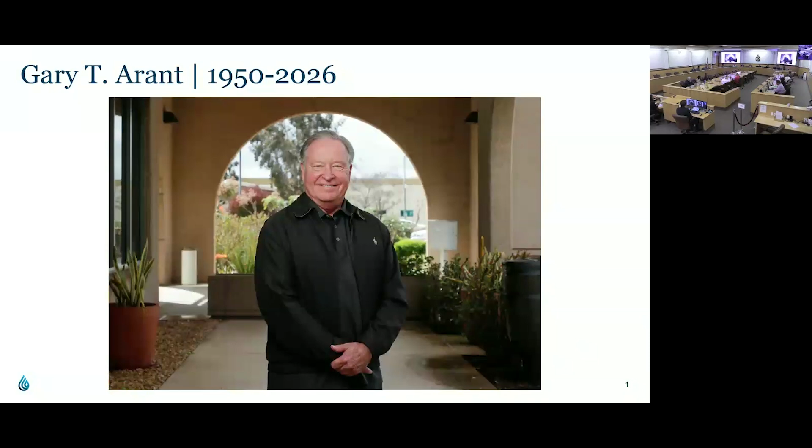Gary passed away on July 16th. He was a sitting member of this board representing the Valley Center Municipal Water District. His departure is truly not just about this agency and what it means to us here, but so much to the broader water community and to so many of us who had the privilege of serving with him. Gary was, in every sense, a pillar of this institution. He was a presence, a source of wisdom, and someone whose influence reached far beyond this boardroom and far beyond this agency. As our general manager said in his statement, he was an icon in the water world.

And how privileged are so many of us to have known him. I will confess, I didn't have the blessing of knowing Gary for as long or perhaps as personally as many did in this room. But what I will always remember and always be grateful for is how accepting he was of my service here, not only because of who I represent on this body, but for who I am as a person.

That meant a great deal to me personally, and I believe so many of us had that same experience with him. Like many, Gary was someone I looked to—someone I looked to when I wanted to make sure I was on the right track, someone I looked to when I wanted to know whether what I was thinking or the vision I had was crazy or actually made sense, someone I looked to simply to better understand.

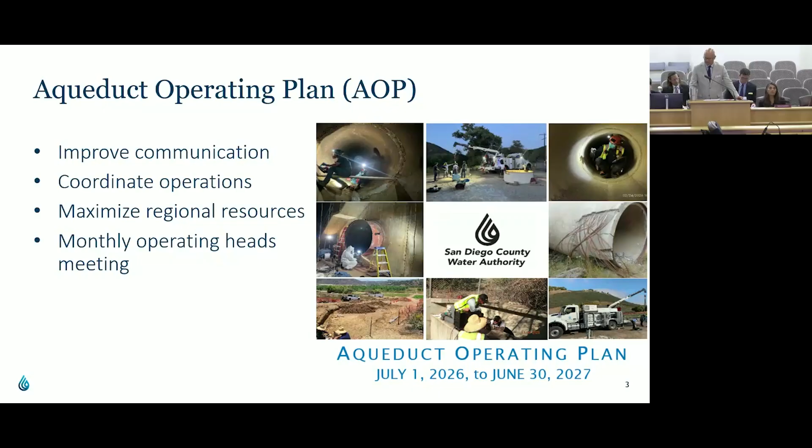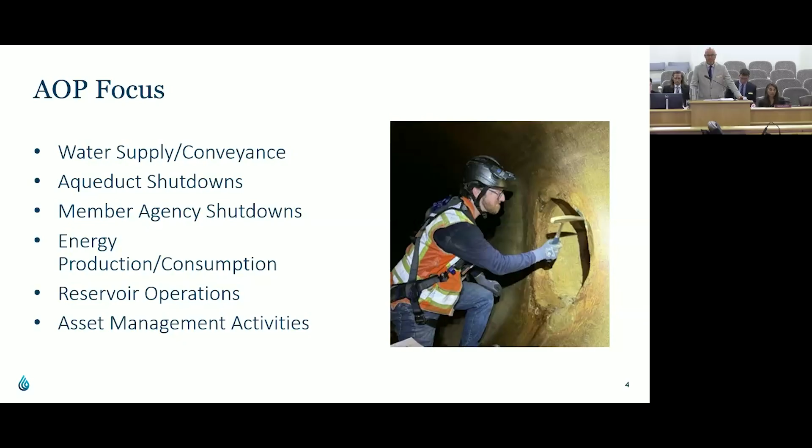The AOP is organized around 6 key focus items that collectively support reliable water service throughout the region. These include water supply and conveyance, aqueduct shutdowns, member agency shutdowns, energy production and consumption, reservoir operations and storage management, as well as asset management and major maintenance activities. Together, these areas provide a comprehensive view of how we operate, maintain, and improve the aqueduct system.

Water supply and conveyance planning is one of the most important components of the AOP. We use member agency demand projections along with forecasting tools and operational modeling to estimate future demands and evaluate system performance. This allows us to assess available water sources, contractual obligations, treatment and conveyance capacity, operational constraints, and water quality considerations. Our goal is to ensure that we can reliably meet regional demands while maintaining flexibility and operational resiliency.

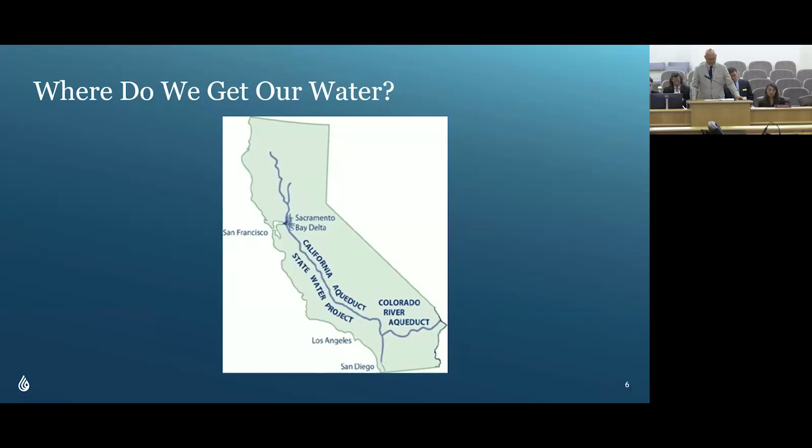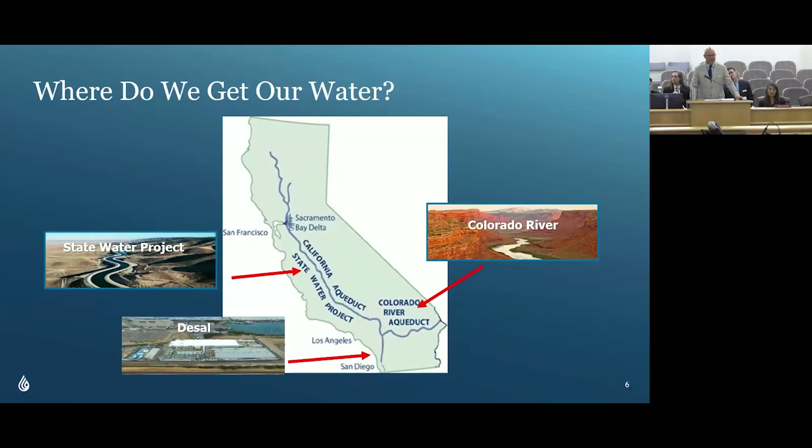So where do we get our water? I think this is an important section. The next section of slides provides a little background history on the operations of the system. We're all familiar with the Colorado River water that comes into the region. We're also supplied with the State Water Project, and back in the mid-2010 to 2015 area, we introduced desal into that mix. So we have a very broad supply of source water coming into the region.

How do we do it? There's roughly about 300-plus miles of pipeline ranging in size from 30-inch to 108-inch in diameter. Within that infrastructure, there's roughly 1,600 structures that allow those pipelines to operate properly, including blow-offs, pump wells, and air valves. Just about 100 flow control facilities—majority of them are in service, some are out of service—but that allows us to pull off of the aqueduct system to maintain water deliveries to our member agencies.

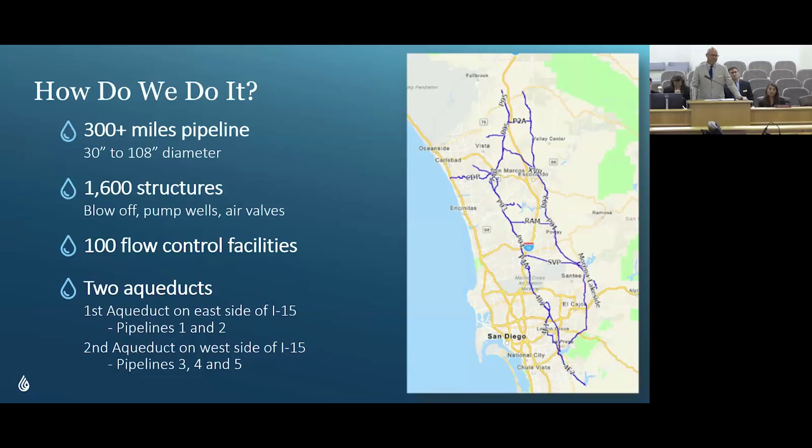Those control facilities and all those structures are contained within the 2 aqueducts. The first aqueduct is on the east side of the 15 freeway, which consists of pipelines 1 and 2. The second aqueduct is on the west side of the 15 freeway for the most part, which consists of pipelines 3, 4, and 5.

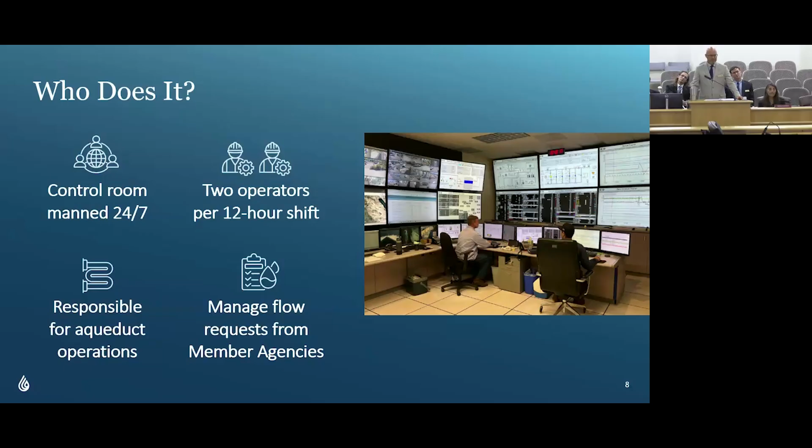So who does it? Well, the control room is manned 24/7. There are 2 operators in that control room to ensure they are monitoring everything taking place. Those operators work 12-hour shifts, 2 during the day, 2 during the night. They are part of a 16-man crew responsible for flow of water as well as water quality. They are the ones who, when member agencies call for water requests—whether more or less water—make those changes and ensure the system is maintained in a balanced state.

Our system is very unique in the sense that it's not a typical distribution system where it's a grid or a Christmas tree. It's basically north to south. So when water is ordered, back in the good old days when it was very simple, water came from the north from Skinner.

Basically you just had to make sure you ordered enough water to make it all the way to the bottom, so you didn't dry up the lower siphons or overflow through the vents into reservoirs. Things changed back in the 2015 timeframe when desal was introduced, and we were able to move water from the coast up into our highest point of the system, basically in the Twin Oaks area at the diversion, to where that water is blended at the Twin Oaks treatment plant, and we're able to feed water even north across over to the first aqueduct.

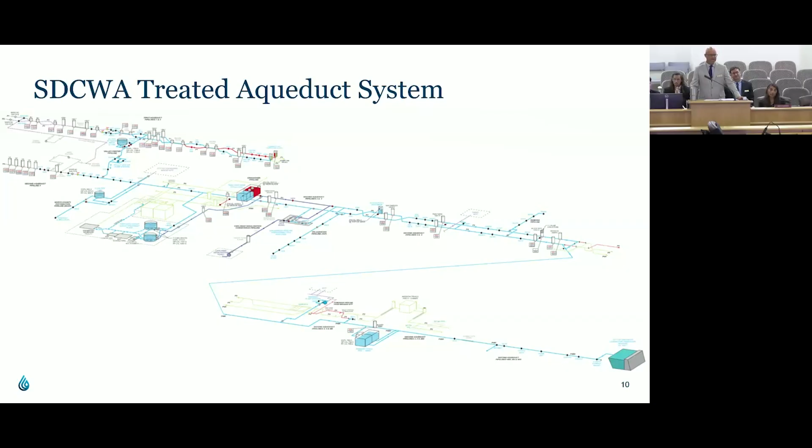This is our untreated system, basically the same thing, a little bit more complex because we actually do have some interconnections with the reservoirs, but ultimately the same concept, a north to south operation.

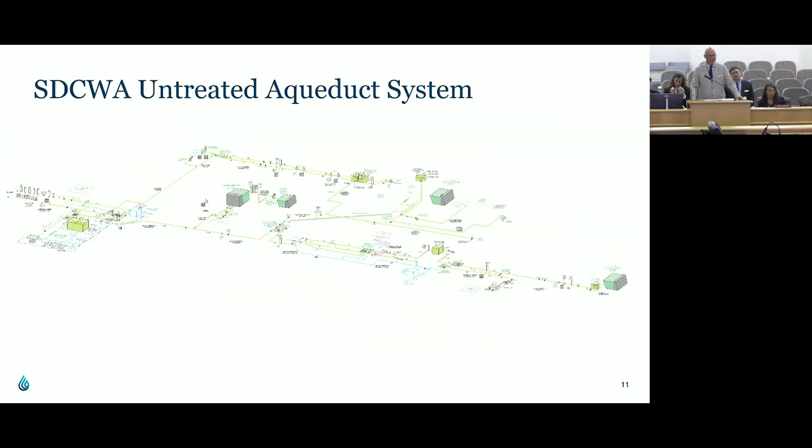So the sources of water that come into our system on the treated side consist of the Skinner treatment plant, which feeds into both the first aqueduct as well as the second aqueduct. Pipelines 1 and 2 have a capacity of 180 CFS, roughly 90 CFS per pipeline.

We are able to take those pipelines down to roughly 13 CFS. The reason why it's 13 CFS is the meter is actually set up for 130 CFS, so it's 10% of the meter minimum. The unique thing about the first aqueduct is we actually can take either one of those pipelines or both to zero if there is no demand on the first aqueduct.

On the second aqueduct, a little bit different story. There is a capacity of roughly 450 CFS. You'll notice I made the comment about 10% of meter capacity, so you would think that minimum would be 45. A number of years back, because of the change in regional demand and operations of the system, we collaborated with Metropolitan to install a bypass around the main system to where we were able to operate down to a lower volume to maximize the region's water sources.

The challenge is, why there's 2 asterisks on there, is we cannot operate pipeline 4 to 0. We always have to maintain water deliveries on pipeline 4, which makes it very challenging. Good and bad, but because of how the system was operated or designed, it cannot withstand that gradient. There's no way to just stop the flow. So that's why there's the 2 asterisks, just to reiterate that.

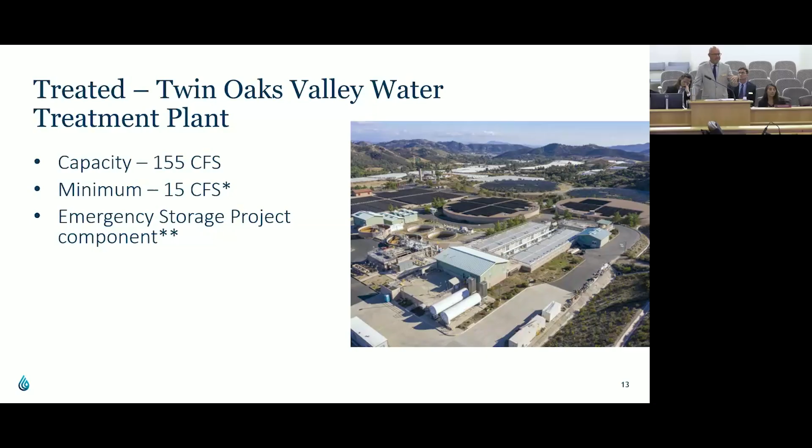Over the course of its operation, we have worked with their team to allow them to make changes within the system to where we can actually turn them all the way down to 10%, roughly 15 CFS. It's a bit of a roller coaster ride, to be honest, operationally, but it can operate all the way down to that level. And because of its unique location and all of the supplies in the region, we are able to consider this a major part of the emergency storage project.

We also have the Carlsbad desal plant, which came into play back in the 2015 timeframe. 83 CFS capacity, roughly - if you want to get technical, it's 83.55, but we'll stick with 83. We can operate it as low as 26 CFS, and it is a critical component as well as the emergency storage project.

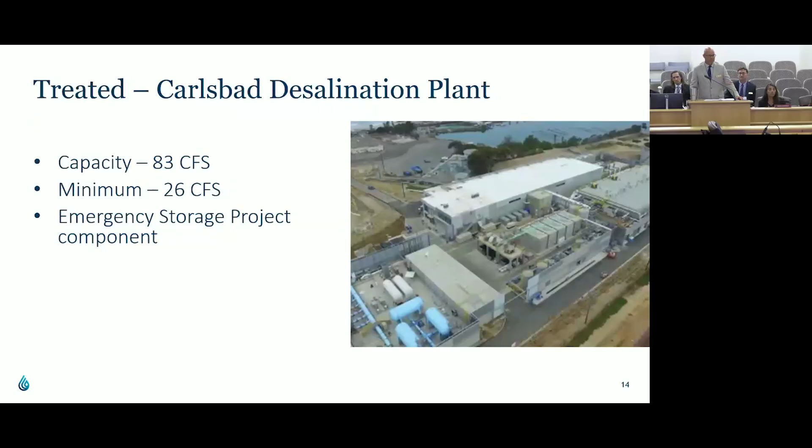On the untreated side, we have 2 aqueducts or 2 pipelines within the second aqueduct that allow us to convey untreated water into the system. Total capacity, roughly 780 CFS. We can take those down to the minimum. We can also take them down to 0 if we need to.

We also have Olivenhain Reservoir, which provides us a body to store water for emergency purposes as well as operational needs, with capacity just under 25,000 acre feet. Depending on hydraulic conditions on the system, we're able to gravity into the reservoir up to 75 CFS if we can configure it appropriately.

We can withdraw water up to about 84 CFS as well. In the event we have to pump, because of system hydraulics, we have to overcome the downstream head conditions, so we utilize the pumps at that station. They're each 2,500 horsepower, so they're not little Home Depot pumps. Roughly up to 120 CFS on the inflow and up to 340 CFS coming out.

There's a little bullet at the bottom of this slide about limitations. These are because of the water quality within that reservoir — the downstream users worked together as a technical advisory group to come up with certain parameters that the water coming out had to meet. So it's not a direct 'we want to take 50 CFS out.' We have to consider the actual source water in the reservoir or aqueduct and make sure it's within a certain percentage of the constituents before we can allow that water out, which is challenging, but it is a limitation.

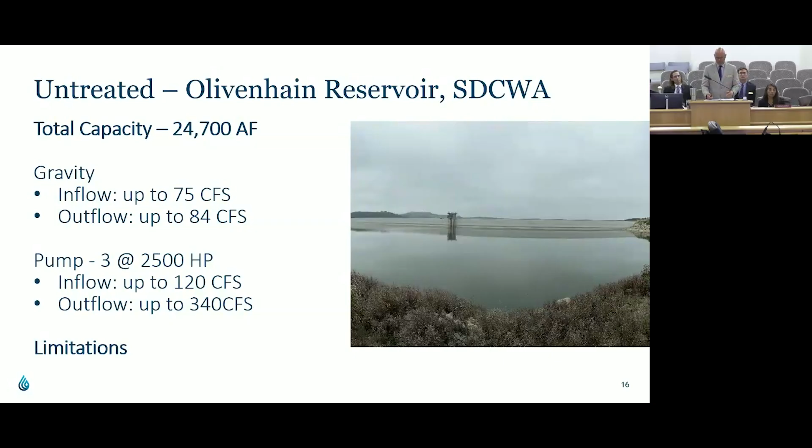San Vicente Reservoir is the other reservoir in our region where we have storage rights, up to almost 160,000 acre feet. Inflow by gravity off the first aqueduct, up to 150 CFS we can put in. On the second aqueduct, with the San Vicente Tunnel and the fill chute, we can put up to 350 CFS in. I have yet to see the 350 mark honestly, but when we had those torrential rains a few years back, we were pushing almost 300 CFS into that reservoir because there was no demand elsewhere.

On the outflow side, we have a pump station at the base. We're able to use 1 or 2, not 3 pumps at a time — they're 7,500 horsepower, so these are even bigger. There's an asterisk by that line because 2 of the pumps share the same variable frequency drive, the VFD, so you can't run them simultaneously. At most, we can run 2 pumps at the same time, pushing up to 320 CFS out of that reservoir.

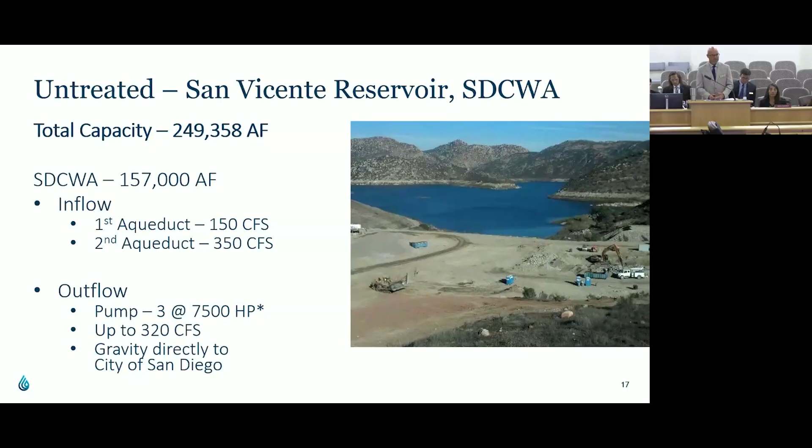We also, with the interconnections, have the ability to gravity into the city's El Monte Pipeline, which allows water to be fed to the Miramar Treatment Plant, providing some operational flexibility.

All of these things play into this slide. A number of years back, the board in the region decided to invest in emergency storage for regional resiliency, which includes those 2 reservoirs, as well as the Twin Oaks plant and the desal plant. This system of reservoirs and interconnected pipelines allows us to maintain 75% reliability and delivery of water during an event of full separation of water from up north, in a 2-month or 6-month exercise. So our region is set up extremely well if and when, knock on wood, something were to happen.

So how does that work? Well, San Vicente Reservoir has the ability to pump that water out, and we can basically feed the lower section of our system to all the member agency treatment plants. You'll notice the arrow on the upper part of that screen does not go all the way up — the water in San Vicente Reservoir hydraulically cannot move any further than basically the Del Dios Highway area. That's a good landmark, but it keeps all the treatment plants south of that in water in the event of an emergency.

One unique thing to note while we have this slide up: the San Vicente Pump Station was put in place primarily for emergency storage operations. We've changed our mode of operations from day-to-day to where this is now part of our tool chest. We're actually pulling operational storage out of the reservoir as we speak, about 100 to 150 CFS from previously stored water. So we're getting operational use, which is a huge value to keep — pumps don't like to just sit, so it's a huge benefit to have that in our toolbox.

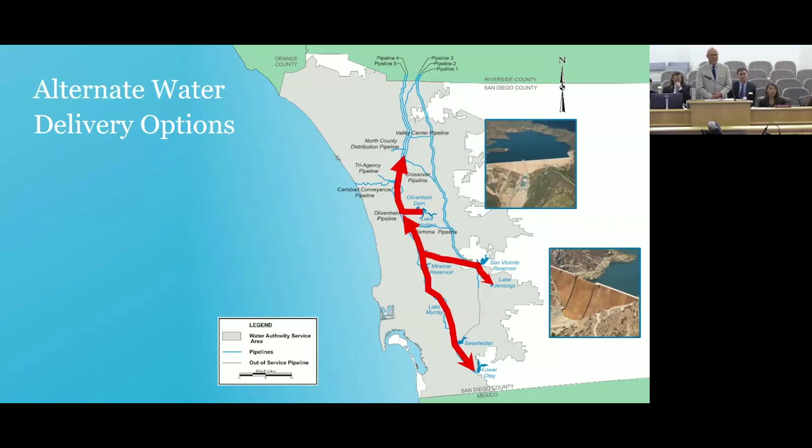In addition, we have Olivenhain Reservoir, which basically feeds the upper portion of the system, keeping all the northern treatment plants in water when an event takes place. We also have the Carlsbad Desal plant, which puts treated water into the system up to Twin Oaks and allows us to maintain water deliveries to all of our flow control facilities. Great operations and investment — an awesome strategy so that in the event something were to happen, we are covered.

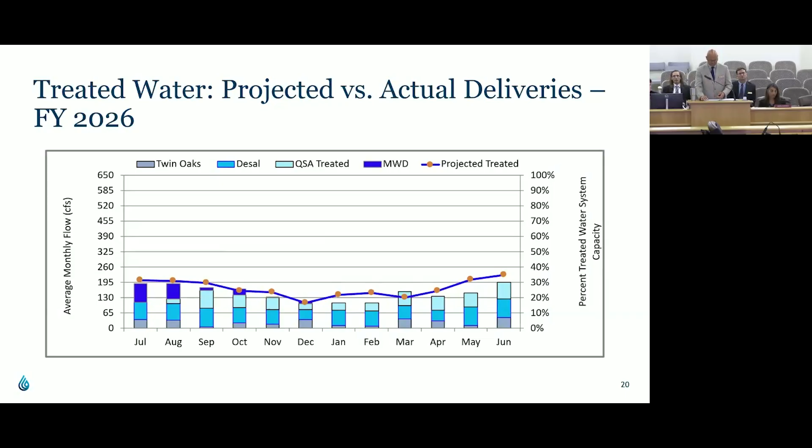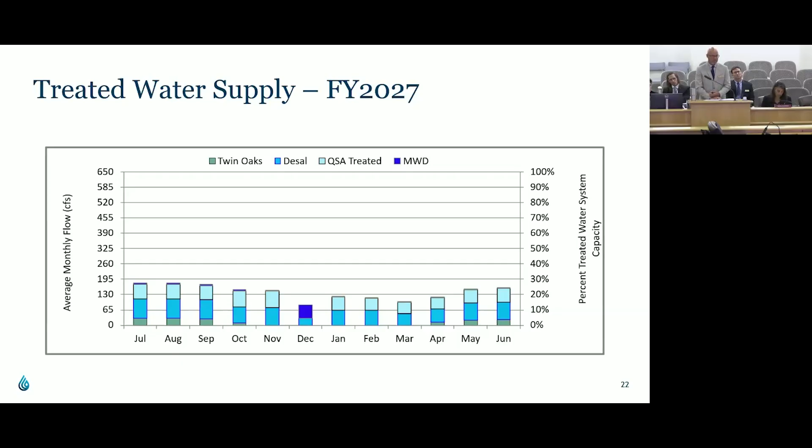Looking ahead in fiscal year 2027, treated water deliveries are projected to peak at approximately just under 30% of treated aqueduct capacity. We will use all of the sources of water. You'll notice there's a little bit less shown on Twin Oaks for the year, because Twin Oaks production is lower due to the Pipeline 5 Reline project, which starts in early November and takes the plant offline while that's taking place.

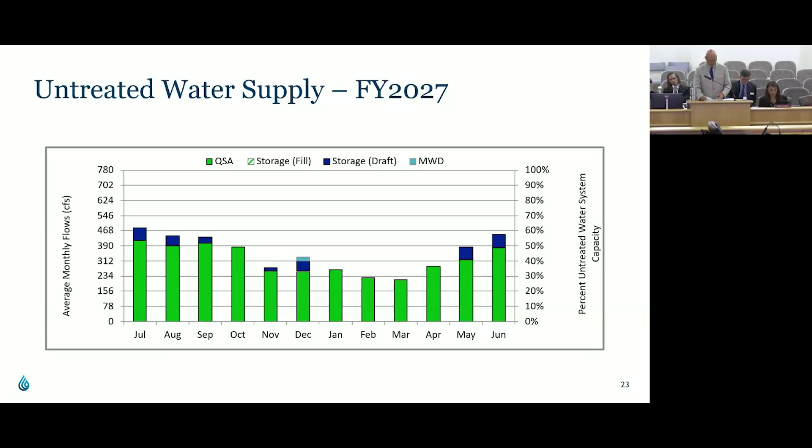On the untreated side, we are projecting roughly just a little over 60% pipeline capacity based on projected demands. Good supply mix: over 90% is going to be supplied by QSA, roughly just under 10% is operational storage pulled from our reservoirs, and the balance, seen around December, is a slight sliver for MWD deliveries. That'll help balance the QSA because demands are never perfectly projected or actually taken, giving us some flexibility at the end of the year. These projections demonstrate the continued importance of QSA supplies in the region's overall water portfolio, and we do not anticipate any conveyance constraints or limitations this year.

Aqueduct shutdowns and outages: shutdown planning is a year-round effort that relies on extensive coordination with both internal departments and external stakeholders. We maintain a rolling 3-year outlook to identify upcoming operational needs and maintenance requirements. Each year, a draft shutdown schedule is developed by January 31st, giving member agencies and operational staff sufficient time to coordinate activities and prepare contingency plans for planned outages and shutdowns. The objective is to safely complete the necessary work while minimizing impacts on water deliveries and maintaining high levels of customer service.

Each shutdown or outage undergoes a detailed evaluation process strictly by itself. For every event, we review who is affected, what work will be performed, when the work can be completed most effectively, and where the impacts will occur. We also evaluate potential impacts to member agencies and opportunities to combine multiple projects into a single shutdown window. In general, shutdowns affect a larger portion of our system, whereas outages are more localized with very minimal operational impact or footprint.

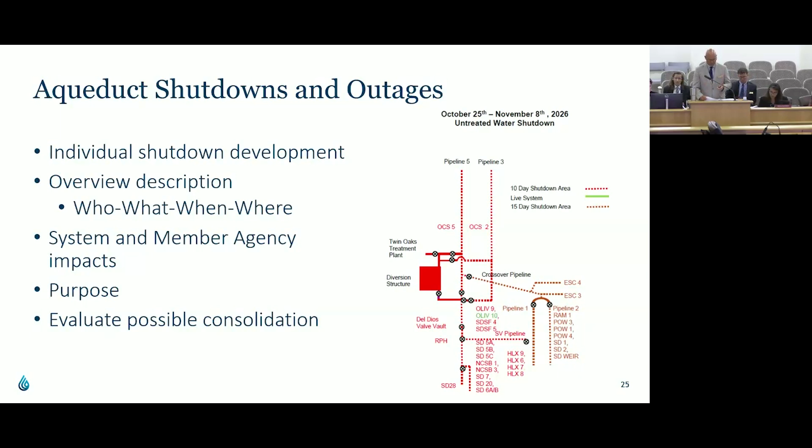Here's our shutdown schedule. There's not too many on there, but if you look in those bubbles there's a lot of work activities taking place. We currently have 3 planned treated water shutdowns shown by the 3 blue boxes, and 2 treated water outages on the bottom in orange, which are our pre-scheduled desalination plant shutdowns. We also have 2 untreated water shutdowns scheduled. These activities support inspections, maintenance, facility improvements, and other work necessary to maintain system reliability.

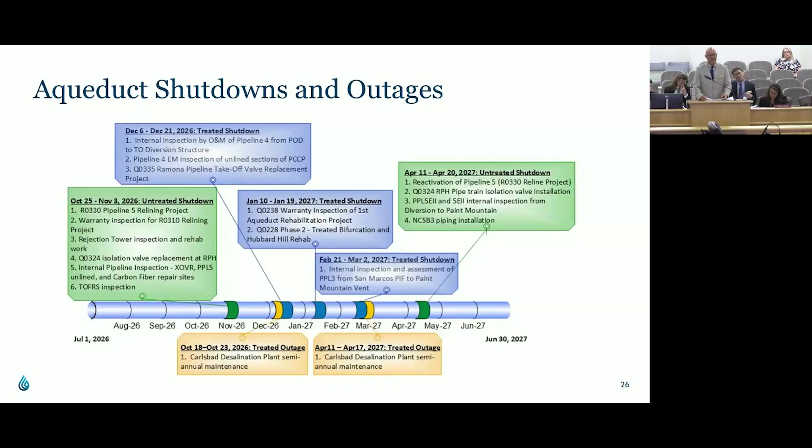Careful coordination helps ensure that impacts to member agencies remain manageable and predictable. It's not just about our shutdowns, though—it's also about the member agency shutdowns. In addition to our own, we coordinate closely with member agencies and their operations staff to be aware of their planned activities so that hopefully there's no overlap causing issues. This collaboration allows us to understand regional impacts, identify potential conflicts, and find opportunities for coordination, resulting in more efficient maintenance scheduling and improved reliability throughout the region.

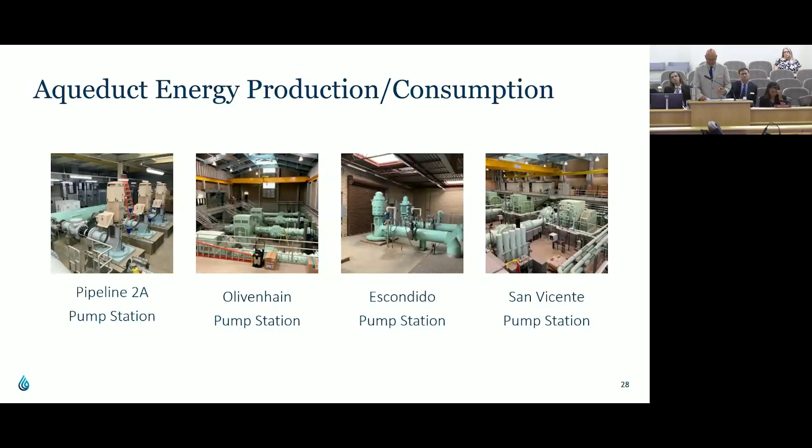Energy management continues to be a significant operational focus. This slide highlights several major facilities that are our high energy users. Obviously the pump stations, at 7,500 horsepower and 2,500 horsepower, consume a lot of energy. We're always monitoring energy use at these facilities to identify efficiencies, manage costs, and support operational efficiencies.

We also have additional high-use facilities, the Miramar Pump Station and Twin Oaks Valley Water Treatment Plant. We also have our solar systems installed at the Escondido and Kearny Mesa headquarters, as well as the Twin Oaks Flow Regulatory Structure.

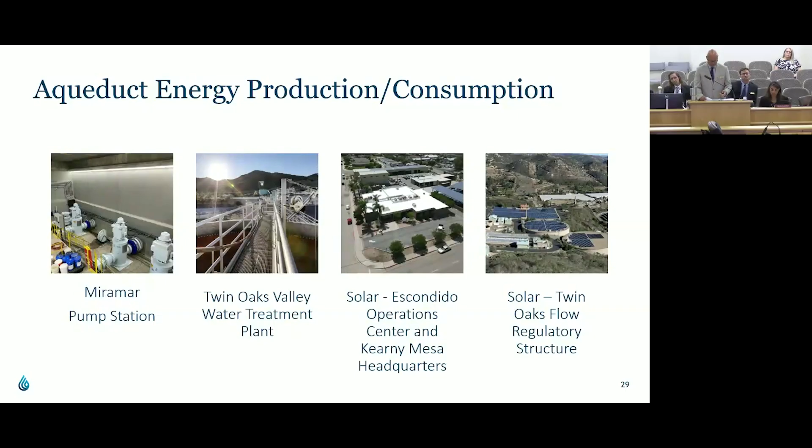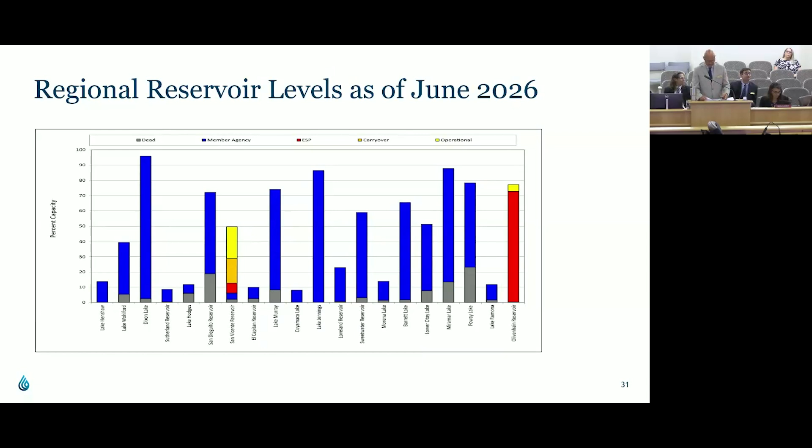There we go. All right, so almost on the home stretch.

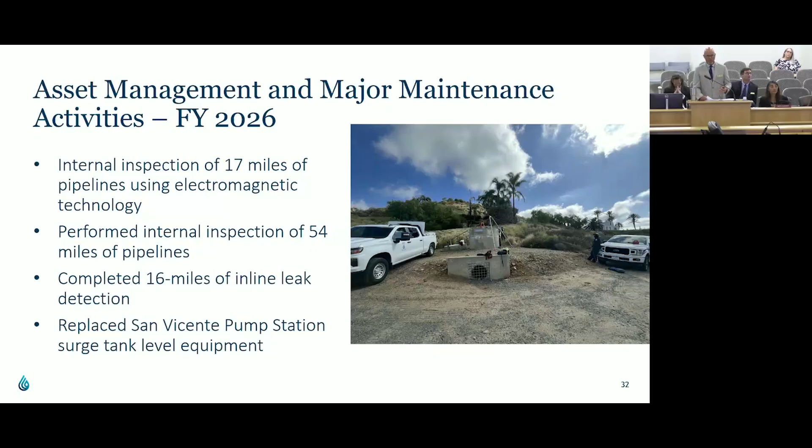Our asset management and major maintenance activities accomplished this past year. This just highlights a few of the activities. A lot of internal inspections on the pipelines, taking advantage of those shutdowns, getting in there and using the best technology available to ensure we're getting the most data we can to make informed decisions on our path forward as far as maintenance.

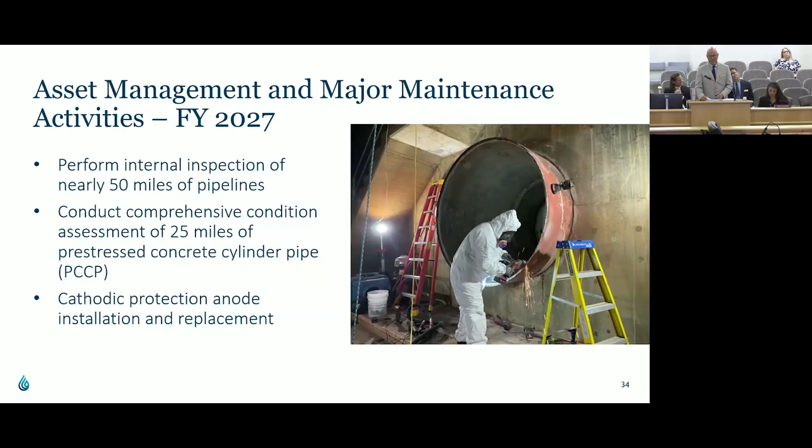Moving into 27, again a lot of pipeline inspections. 50 miles of pipeline is currently on the books for internal inspection, with a more in-depth assessment of 25 miles of our PCCP pipe, the pre-stressed concrete. Continuing with the cathodic protection as well, which is a huge item that seems to never go away.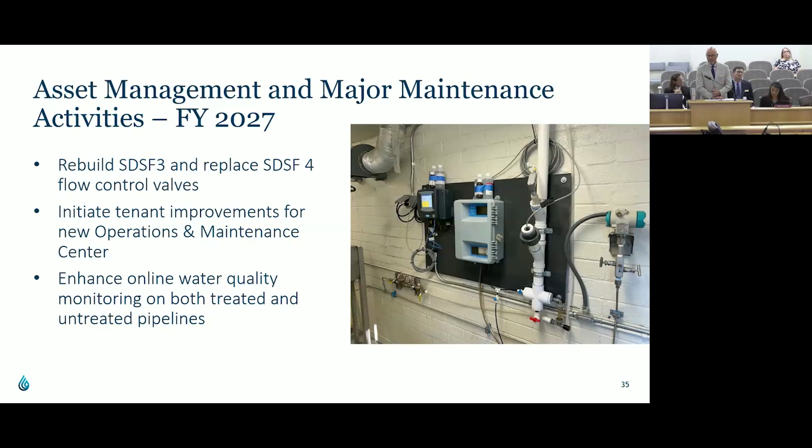Again, the buildings and our infrastructure are getting older. We're having to rebuild some of our flow control valves and replace them, as they aren't necessarily getting the extended life that we need. We have more opportunities for water quality improvements as well.

But this is the slide that you've all been waiting for, right? Expect the unexpected. We're all fans of Big Brother on TV, right? We can have the most detailed plan out there and work with everybody in the room, everybody in the region, but you never know what might get thrown your way.

And this past year, we had some curveballs. The pipeline urgent repair up on the northern part of our treated system was not expected. We were planning on addressing that in this upcoming shutdown year, but because of the concern and the wire break activity, we had to pull that lever to address it. It's in a very challenging location. As I mentioned earlier, we can't just shut a valve or stop flows, so it's a huge impact to work on that area.

And then after we wrapped that one up, we got a nice little phone call about water on pipeline 3 down in the middle part of our section, and that's what we're dealing with right now. So when we come to work every day, it's what's next? Which fire is going to get thrown at us?

The AOP, these events that come unforeseen, they reinforce the importance of maintaining flexibility within our operations plan and having staff, resources, and contingency plans ready to implement when needed. So the AOP provides that framework of here's our guidelines, but it allows us that flexibility to adjust when these fires do come up.

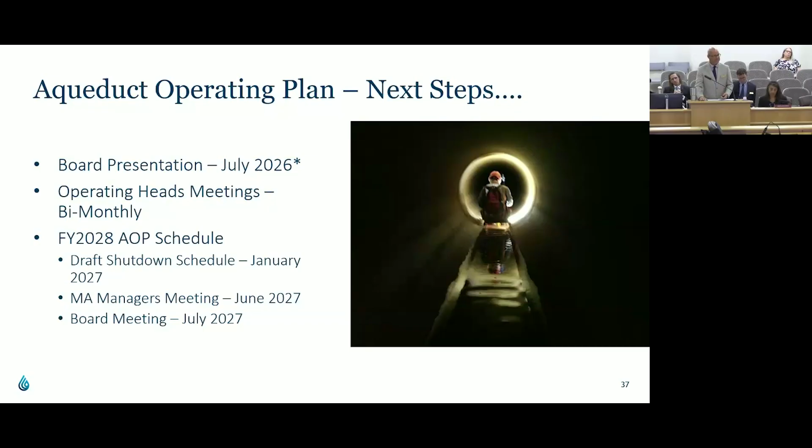So this basically concludes my presentation on the fiscal year 2027 Aqueduct operating plan. I'd be more than happy to answer any questions.

Thank you, Chris. Director Fong Sakai. Thank you for this very timely presentation. And Chris, you and your team, you guys always do a terrific job, I think. I do have a question.

I know that the projects that we work on, and our priority system, are tied also to our biennial budget and the risk that this board directs you to take. So it's my understanding that we're at a moderate risk right now. That is correct.

I don't know whether it would be this committee or whether it would be Finance Committee, but perhaps we might bring back to this board at some point what the ramifications would be if we decided to change our allowable risk to low risk. And I'd like to also see how that would change how we monitor our pipelines for that risk. Because anytime we have emergency repairs, it always costs us a lot more money. So if we could identify what the risk could be in advance and make repairs a day before failure, that would certainly be advantageous, I think, to us.

Thank you, Director Fong Sakai. Staff is preparing and will be preparing some analyses. Your input is very important to help us shape those. Thank you so much.

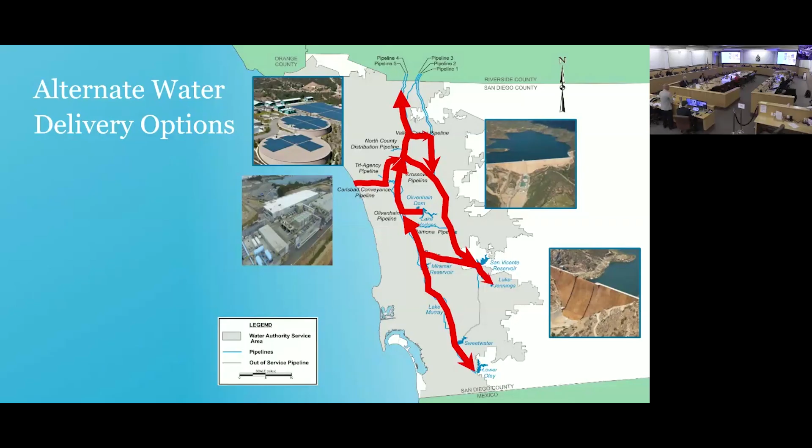Great question, Director Paul. Through that section of our system, we have Pipeline 3 and 4, both treated. The flow control facilities along that stretch have takeoffs off both pipelines, so we moved everybody over to Pipeline 4, which is still in service. We were able to completely isolate Pipeline 3 to drain it down and address the repair. It is a big inconvenience—there are hydraulic differences between Pipeline 3 and 4; they don't have the same grade lines through all the different siphons. From a capacity standpoint, we're meeting the demands.

If there was an event, it'd make it very difficult because of the limitations on Pipeline 4. But the team in general has learned how to operate the system way outside of the original design to make the best of these challenging situations. For example, during the Pipeline 4 shutdown—I know your question was on Pipeline 3—during those normal shutdowns, the Twin Oaks treatment plant is offline because it feeds into Pipeline 4 and there's no isolation from the north. I sat down with the crew and they had a great brainstorming conversation: we have the desalination influent piping coming into the clear wells at Twin Oaks—why don't we raise the level in the reservoir and overflow back into the influent pipeline? It blends with desal and we can maximize and use Twin Oaks when before we couldn't, because it feeds into the pipeline further south. On the Pipeline 3 section, we don't necessarily have that flexibility—it is challenging that you're on one pipeline, but we are managing.

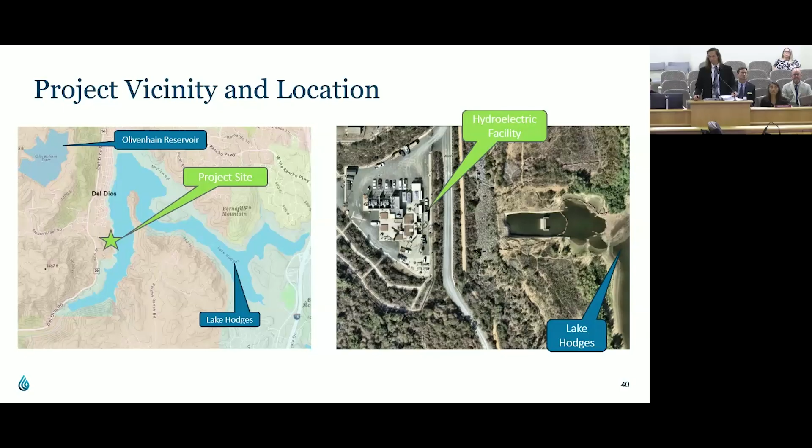This deficiency also poses an environmental risk. Should a breach occur in the facility, materials and contaminants could leach into the lake.

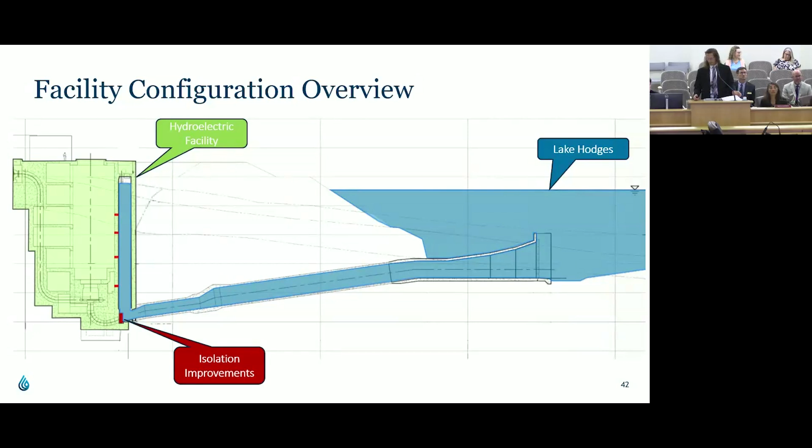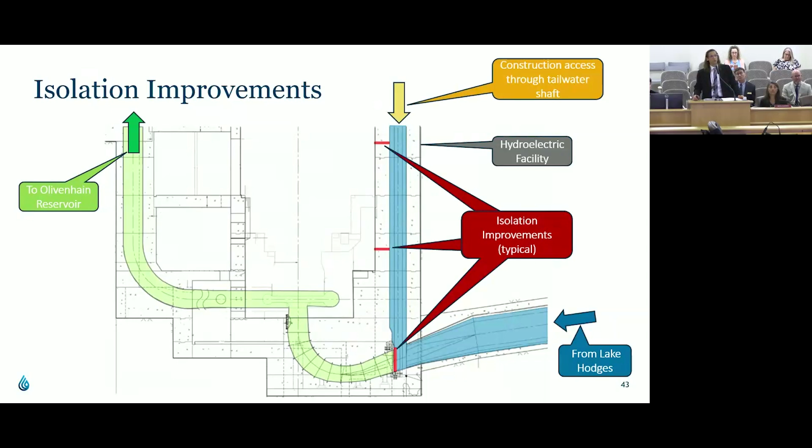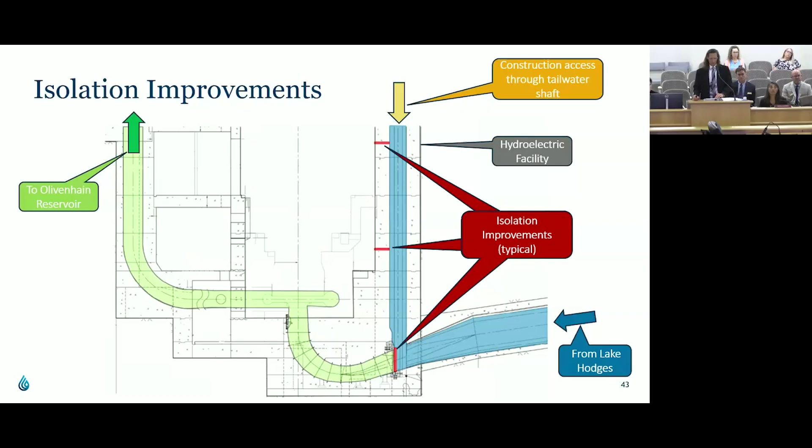The isolation, shown in red here, will be constructed underwater, with workers entering through the tailwater shaft. This underwater bulkhead construction is quite dangerous, requiring a specialized contractor with the proper experience, welding qualifications, and a robust safety program.

Therefore, it's staff's recommendation to award a design build contract to JF Brennan Company in the amount of just over $1.4 million for the Lake Hodges facility isolation project. And that concludes my presentation.

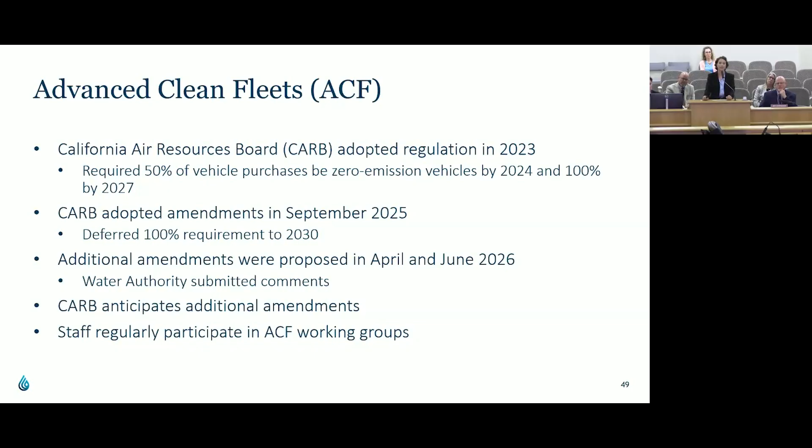As far as the amendments go, we're waiting to see if CARB will end up incorporating those amendments into the regulation. Their staff did say they anticipate focusing on compliance assistance over the next few years rather than enforcement, and that they'll be releasing additional amendments. In the meantime, we'll continue participating in our Clean Fleets working groups and following the regulation as it continues to evolve.

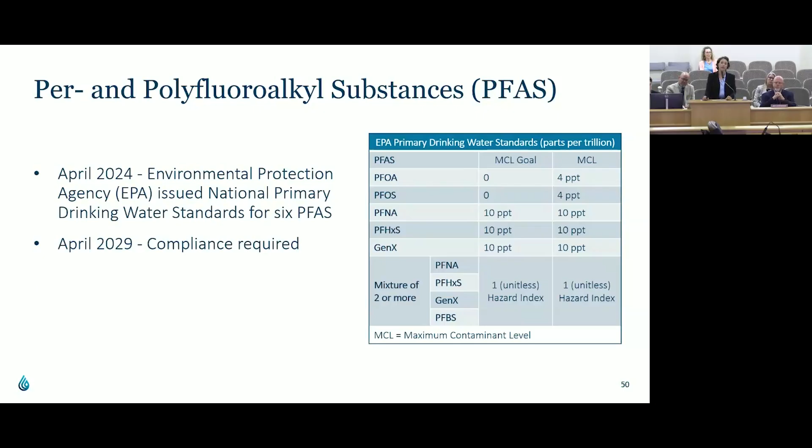Let's talk about PFAS. In 2024, the Environmental Protection Agency issued the National Primary Drinking Water Standards for PFAS. It covered 6 different PFAS, and as you can see from the table, these are in low parts per trillion, very low concentrations that are being regulated. Compliance is required beginning in 2029.

In May, EPA published two draft PFAS regulations. The first would rescind regulations for 4 of those PFAS, leaving behind just the PFOA and PFOS standards. The reason given by EPA is that the Safe Drinking Water Act procedures weren't adequately followed when making those regulatory determinations. Their intent is to finalize that rule in September and then reevaluate those same PFAS at a later date for possible future regulation.

The second proposed rule would provide a framework for water suppliers to receive a 2-year extension on compliance with the PFAS regulations. Some of the requirements are that the water supplier can demonstrate their need for the extension, and also that they're not located in a state that has already obtained primacy, which is where the state has authority to implement the federal regulation and oversee it.

California is a primacy state. So once the state obtains primacy, it is up to the state's discretion on who is eligible for an extension. We did provide comments on both of these proposed rules, largely in support of what EPA is proposing, however asking some clarifying questions and providing some recommendations as well. We shared both of the draft comment letters with member agencies for their feedback.

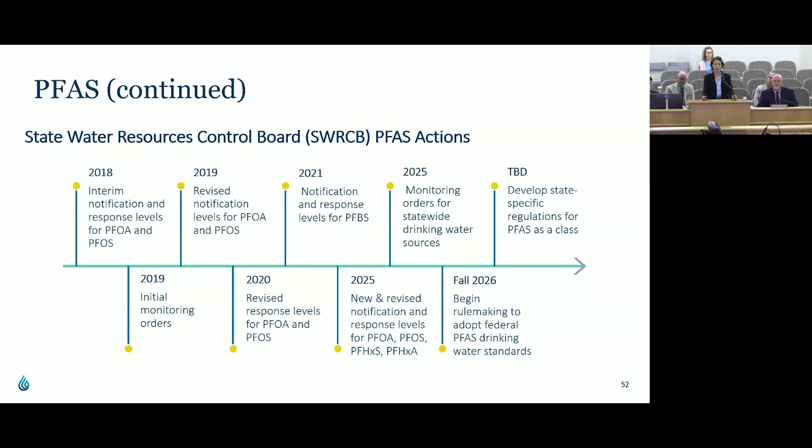Let's switch gears to the lead and copper rule. Initially issued by the EPA back in 1991, the lead and copper rule has undergone many iterations over the years, most recently the 2024 lead and copper rule improvements. And again, as a primacy state, California is looking to adopt the LCRI in the next couple months here.

The LCRI includes requirements for water systems to replace all lead service lines within 10 years. It has expanded service line inventory requirements, and it requires water suppliers to sample for lead at all daycare facilities and elementary schools built prior to 2014, located within their service areas, starting in late 2027.

Assembly Bill 1096 requires the State Water Board to create a website that hosts all those daycare and school sampling results in the interest of public transparency.

So DDW is working on developing a handbook for water systems on how to submit the results to the state, et cetera. We've joined an ACWA working group on this topic, and especially since member agencies are the ones that have to actually implement this testing program, we're going to be working closely with them to help provide feedback during the development of the handbook.

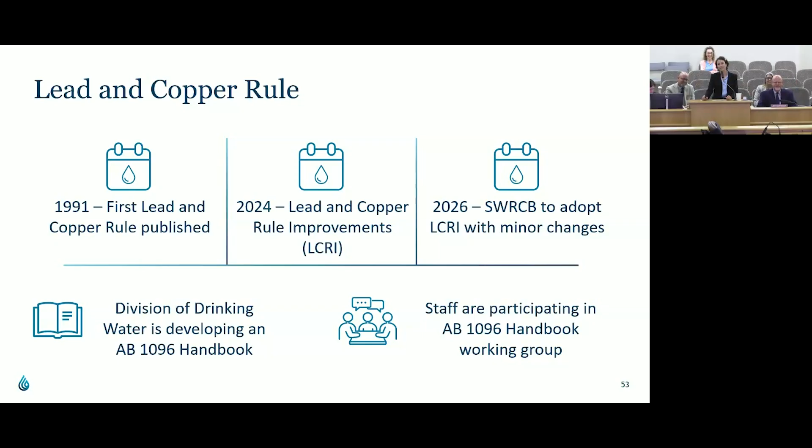Lastly, we have the Unregulated Contaminant Monitoring Rule, or UCMR. The UCMR requires many public water systems to monitor for contaminants that have not yet been regulated, may occur in public drinking water supplies, and have been associated with negative health impacts. These national occurrence data help fill data gaps and help inform which contaminants to prioritize for future regulations.

The EPA releases a new UCMR with a new list of contaminants every 5 years. Just last month, EPA released their draft 6th UCMR, which has 30 new contaminants for monitoring, including solvents, pesticides, and ultra-short chain PFAS. The monitoring is expected to occur between 2028 and 2030, and EPA is hoping to finalize this rule by the end of the year.

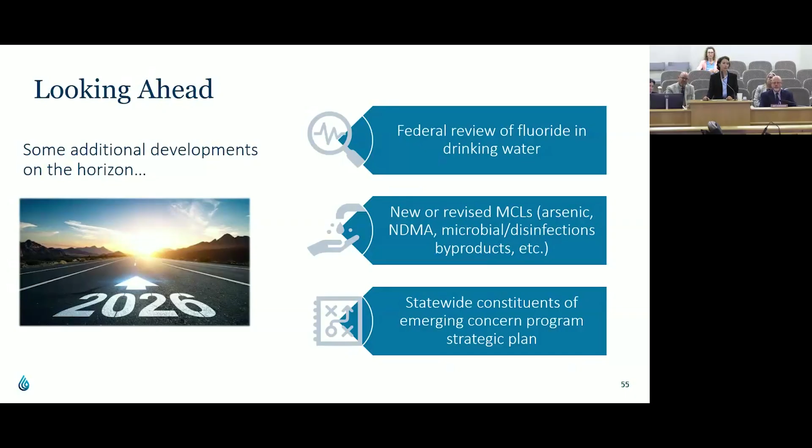It's never a dull moment in the regulatory landscape, and things are always changing. But just some of the topics that we think may be coming up over the next year or so include federal review of fluoride in drinking water, new or revised maximum contaminant levels, and the state's development of a constituent of emerging concern management strategy. I'm sure there will be many other topics that come up during that time as well. So we will continue to follow those, engage in them, work with our member agencies to advocate for the region. And that concludes my presentation.

Thank you. Anybody got any questions or comments?

Thanks for your report. One of the concerns that I have on these type of, like the last one on looking for contaminants—Vista owns a lake, Lake Henshaw, and we are constantly monitoring it for algae issues. And as such, we have seen the technology in testing water jump from parts per million to parts per trillion. I did a mathematical equation on PFAS at 4 parts per trillion: that is like taking 250 square miles of earth and hiding 4 50-cent pieces in it.

So the technology, my point is, has gotten so advanced that they can find anything in the water. One thing we found in our water was arsenic. Now it's well under the normal danger zone, well under. But as soon as you tell somebody in the public we found arsenic, it's like you're poisoning them—they're drinking poison.

And the reality of it is arsenic's in all of our water and always has been. But just having that comment made spreads alarm in the general public. So we as water people need to realize how we manage that knowledge with the public, so they don't get alarmed over naturally occurring things. I'm not saying PFAS is naturally occurring, I'm just saying the panic bell can be hit really hard, really quickly with the general public. Okay, thank you.

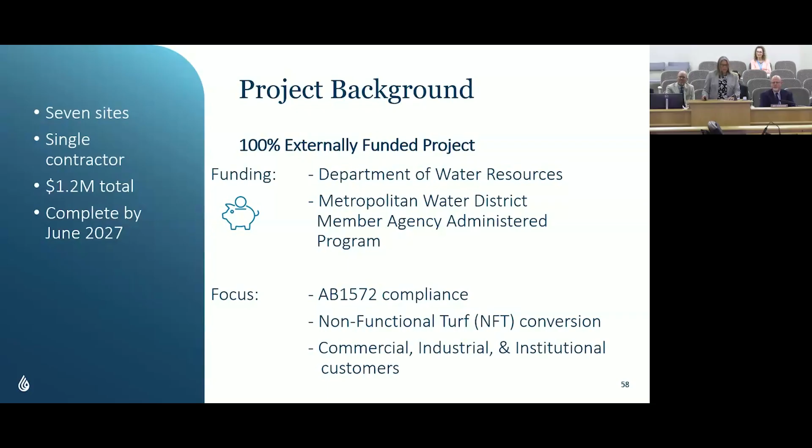These sites become examples for others of climate-friendly planting with trees for shade, colorful plants that invite pollinators, stormwater retention, and pathways to draw people into the landscape, an alternative to merely letting grass die or removing plant life and replacing with non-living ground coverings.

Staff solicited input from member agencies, met with community groups, and used Google Earth to hone in on potential sites spread throughout the Water Authority service area that met the project criteria of approximately 10,000 square feet of highly visible non-functional turf. We then scheduled site visits and discussed project potential and maintenance commitments with site owners and operators.

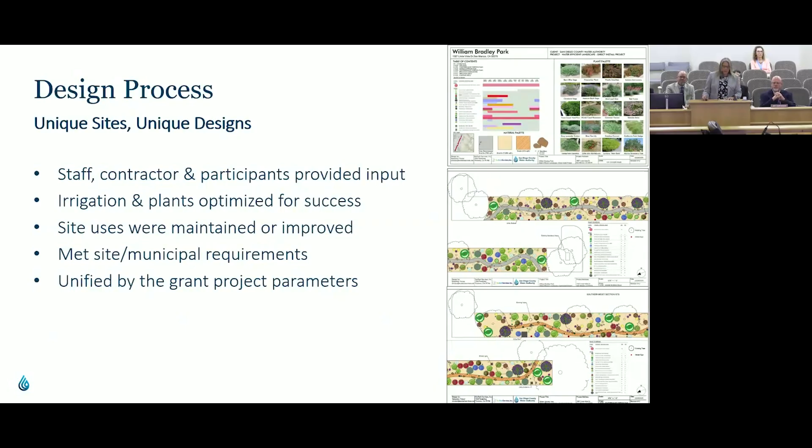Ultimately, staff completed participation agreements with 7 sites to complete the transformations. Each site received its own unique design, you may have heard Debbie mention that earlier. The group, made up of staff, contractor Ecotech Services, and site representatives, collaborated to understand site uses and needs and create engagement with landscape through irrigation, plants, and other design elements. We adhered to site and municipal requirements and were also unified by the grant project parameters.

The plants were selected from our Nifty 50 and Happy 100 plant list with a big focus on sturdy plants that would not only look good but last. You may recall we incorporated many of these plants into our Kearny Mesa office garden last June, and I'd invite you to take a look around and see how things have grown in, and notice the birds, bees, and butterflies taking advantage of our new plants here.

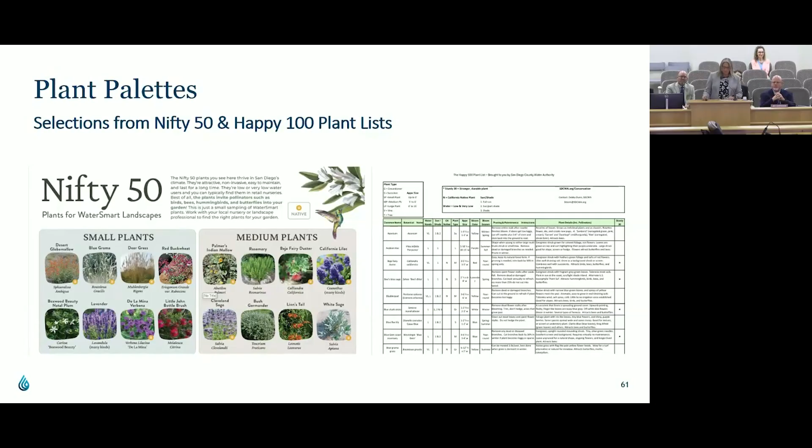Each site had its own challenges. Pre-existing landscape elements and future planned work needed to blend with our designs. People, area surroundings, and terrain drove decisions on a variety of landscape elements, and in some cases lengthened the time needed to complete the site.

At another site, significant underground utilities changed plant placements, and city processes for permits and inspections also took time.

A few sites had to work on critter removal to give the new landscape the best chance of success. And if anyone has tried to get rid of gophers or ground squirrels, you know it's no small feat.

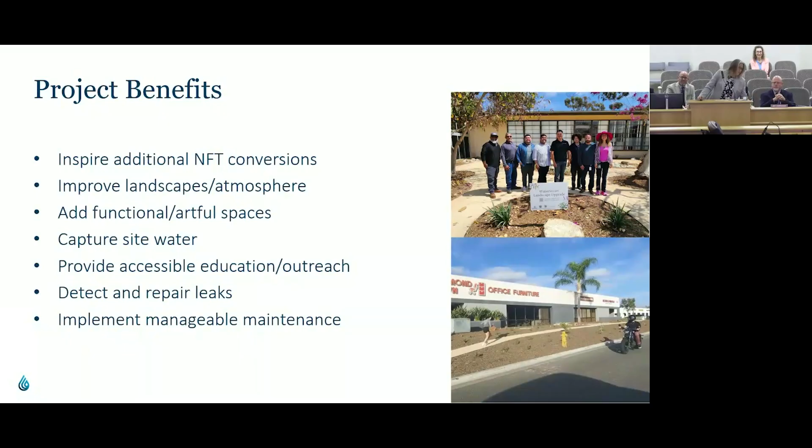So Bradley Park's grass was replaced with a walking path and planted swale last August. This was immediately after. And here it is almost 1 year later and growing in.

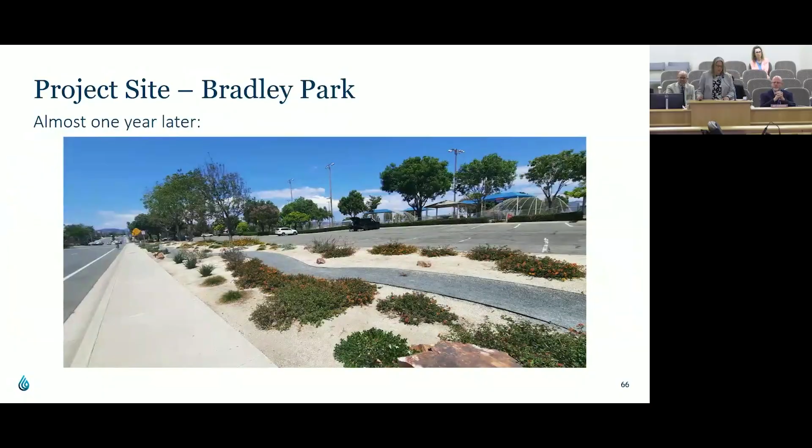This Water News Network quote from Whittier's principal says it all: Now, when parents pull up into the driveway to pick up their kids or come for events or meetings, our school aligns with how we care about the kids in our school.

Mission Bay High School's installation was finished in April, and a permanent educational sign will be added in the coming months.

The Kimball Park, A Reason to Survive site, is our community showcase education garden. And it incorporates welcoming spaces for outdoor learning and gathering. Bilingual permanent signage will be added in the coming months.

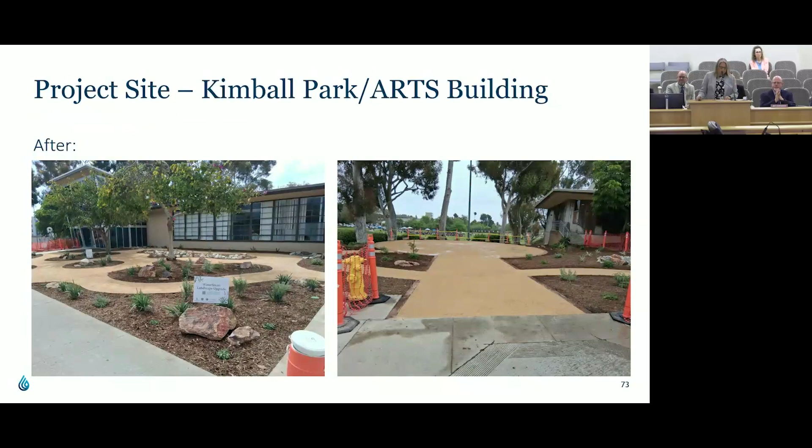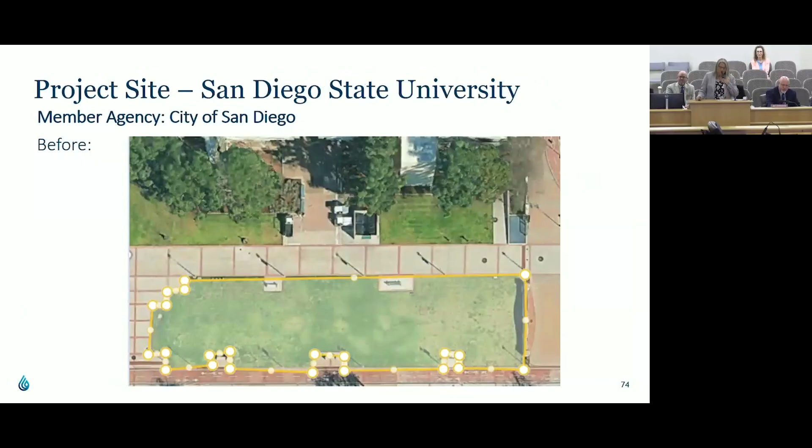The SDSU installation site is in progress and will be completed in August. This is on Campanile Mall for those of you who are familiar with the campus. And that's what it looks like last week.

This is our largest site at over 13,000 square feet, and it will create a relaxing student study and gathering area like you see on the slide, which is actually another area on campus. We'll incorporate a permanent sign at this site as well.

Our last site at the San Diego Community College District's Educational Cultural Complex has just begun the design process to replace the grassy strip between the parking lot and the sidewalk.

And then here's our Raymond Allen Furniture site on Furniture Row in San Marcos. Alicia Yerman from Vallecitos Water District put together a great video with an overview of the program featuring work at this site. And so let's look at that now.

Hello, I'm Debbie Dunn with San Diego County Water Authority. The Water Authority's large landscape direct install program for disadvantaged communities has the goal of educating commercial customers on how beautiful a water-wise landscape can look.

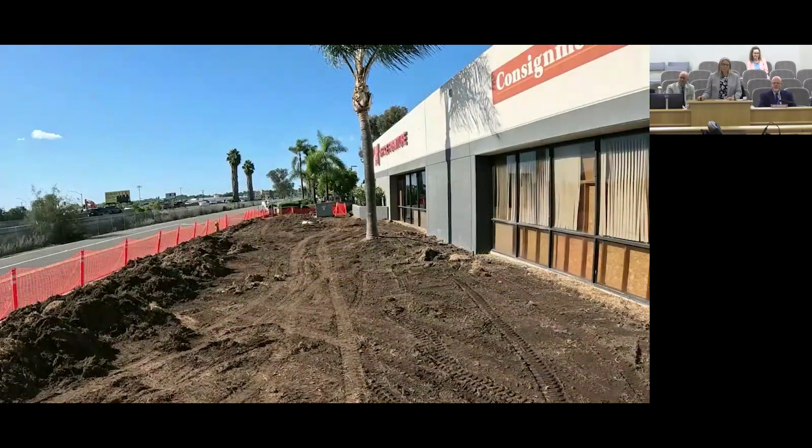We targeted 7 different areas, including 850 Los Vallecitos, took out the grass and planted water-wise plants. We put in plants that have extra flower power, so people going down the 78 freeway can see it and say, wow, I want to do that at my home or my business.

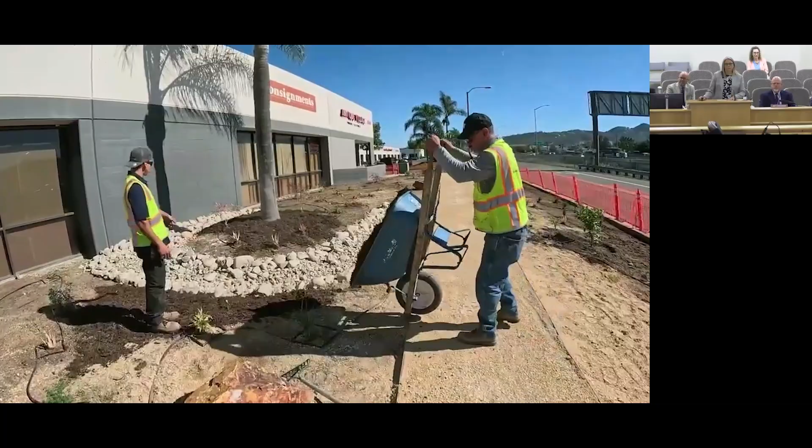Each of the 7 sites are funded through grant funds, and each site is about 10,000 square feet and highly visible, so more people can drive by, see them, and be educated and motivated.

At this site, the overhead sprinklers were removed and drip irrigation was installed. Trees are on their own valve with their own special watering because trees need water less often and deeper.

Good morning, my name is Fred Lacine. I'm the owner of Raymond Allen Office Furniture. We're located in the Vallecitos Water District.

During the initial planning, I requested that we get a pathway up front. I think the pathway is a wonderful addition because as the plants grow, people will walk along this way. They're going to enjoy the plants. It's just going to be a really good thing for the community as well.

The plants were selected by Debbie Dunn. She asked us to pick out plants that we would like for the project, the colors, the style of plants. They put a kind of circular arch from the center of our building where water comes off the building. This will act like a French drain, so to speak. Water will come down and dissipate and not go into our building.

People are going to want to come and say, let's just go for a walk and let's see what's inside this store. And there's some wonderful office furniture in here. It's really a nice process, but you do have to have a lot of patience. And if you're patient, good things will come at the end.

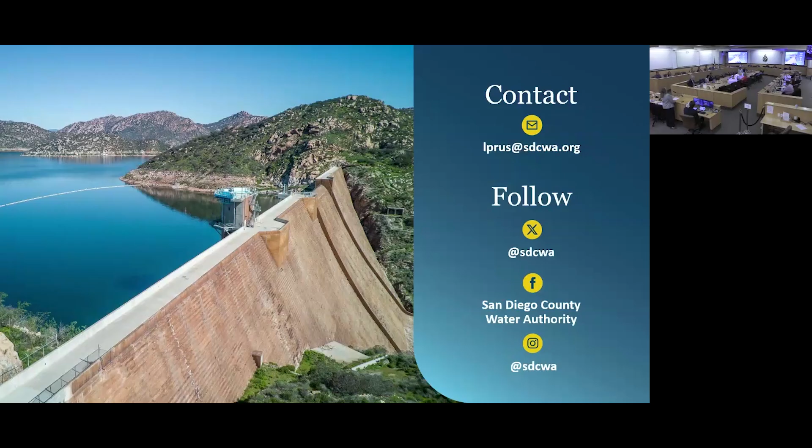Director Lyons: Thank you, Chair. I wanted to make a point, call out one of the things that you presented and then also make an additional point. When you presented that 3 of the 7 projects demonstrated that they had water leaks, I just want to call everyone's attention to the fact that nobody wants to waste water.

And I think that's one of the primary benefits of our water conservation program, to call to the attention of the public that, yes, nobody wants to waste water. So we want to help use water really wisely. And that's how we're really good stewards.

From my perspective as a practicing landscape architect, I find that if you have an irrigation system that's more than 15 or 18 years old, you probably have leaks. And because it's underground, you don't necessarily see it. Sometimes you do, and that's usually when it's very dramatic. That's something important to profile.

Then I also want to go on record saying, if there's the opportunity for continued funding for this kind of program from others, which is really beneficial to us, I would really support us continuing to do this. It's not just about the final product that is a beautiful water conserving landscape, but it's the process and educating people that it's achievable to go through this process and have a good outcome. And Lisa and Debbie, I want to thank you for your good work.

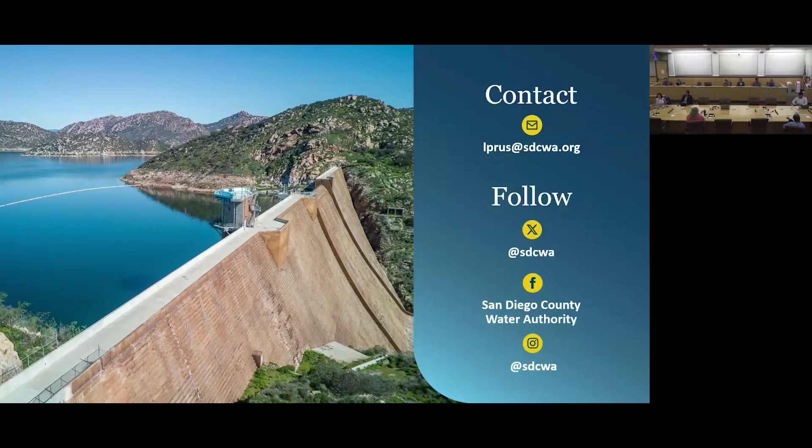Along what Director Lyons said, you mentioned the DWR grants. Is that a limited program that has been exhausted, or is there still grants out there available for owners to apply for to do these kind of upgrades?

This was a special grant. It'll be ending in June, and we will exhaust all the funds that were available for it. We don't anticipate similar funds being available in the future. There's different focuses out there, so our opportunity will be to celebrate these projects and highlight them. In the future we'll look for other grants to do similar things, but this one's exhausted.

Okay, thank you for your report. Appreciate it. Any other questions or comments?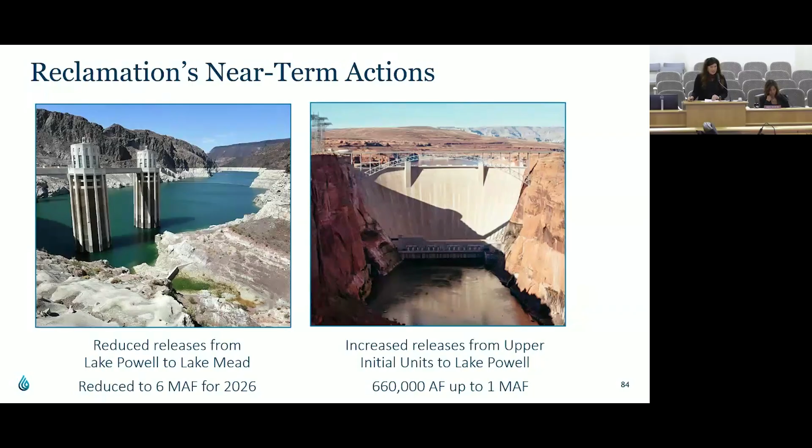So now leading back to development of the post-26 guidelines, while discussions started between the basin states and Reclamation a few years ago, the lower basin states and upper basin states have not been able to reach consensus. I think we've all heard that. After Reclamation's February deadline, after other deadlines were missed, and then their final deadline in February for a consensus agreement wasn't met, Reclamation moved forward.

So two developments that I want to highlight. On May 1st, the lower basin states submitted a proposal to Reclamation to manage the river through 2028. This is not a proposal for long-term guidelines, but a short-term proposal to manage the river through 2028 that would protect elevations in Mead and Powell and would allow time for continuing discussions toward a 7 basin states consensus. Then in June, Reclamation came forward with a separate federally structured alternative, what they called their preliminary preferred alternative. There have been ongoing discussions between Reclamation and the basin states and tribes, but the lower basin states discussions with Reclamation have largely focused on how that May 1st proposal might be incorporated into Reclamation's alternative.

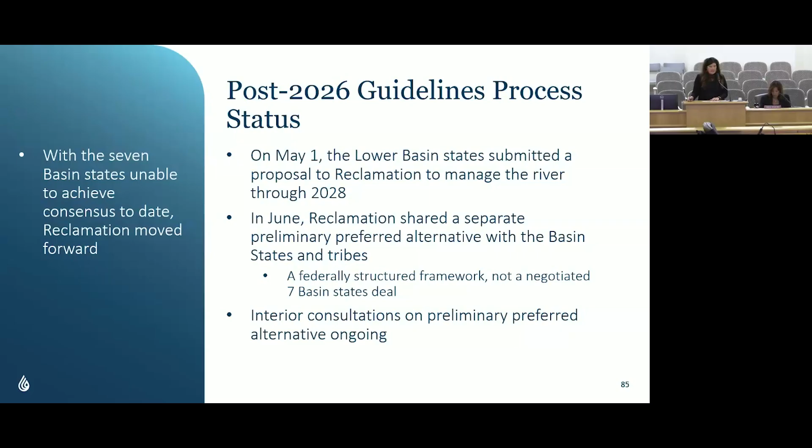Then the lower basin would conserve, and this is the new part in this proposal, an additional 700,000 acre feet in total through 2028, not per year, but in total with federal funding support. I'll talk more about that in a moment. For California, that's 300,000 acre feet in total over those two years.

California's discussions are ongoing on how to share both the reductions and conservation. For the reductions, California's 440,000 acre feet, if based on the law of the river, Metropolitan is expected to take that reduction. For the additional conservation, funding is an important component, and it has been announced that there is up to $354 million in federal IRA funding available to the lower basin, and $100 million for the upper basin. It's important to note this is for conservation only through 2028 at this point.

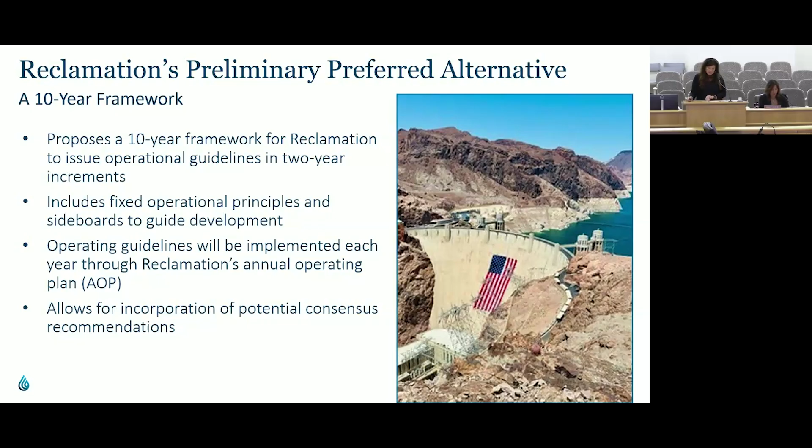So the framework is meant to allow for incorporation, and this is important, of potential consensus recommendations should the 7 basin states reach a consensus in future talks.

So I want to highlight the Water Authority's priorities and perspectives, and Mina hit on these. The Water Authority continues to engage on the post-26 guidelines process through its membership on the Colorado River Board, supporting a framework that protects California's senior water rights and that recognizes our regional investments. The Water Authority believes the lower basin proposal does represent a balanced approach through 2028.

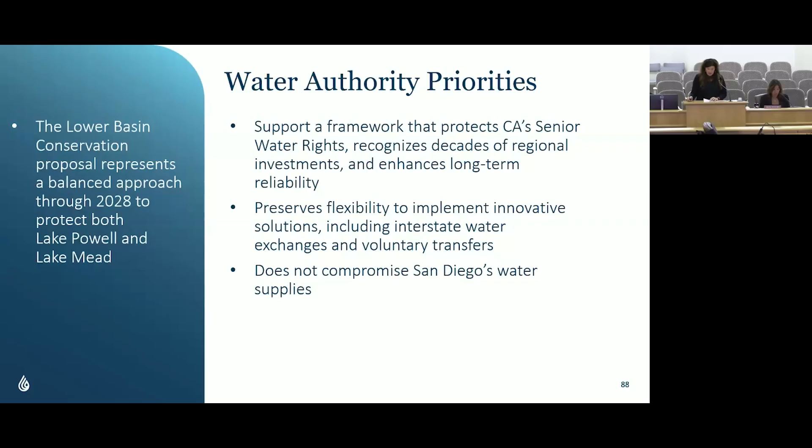The new guidelines must preserve flexible management strategies, including those interstate water exchanges and voluntary transfers, and any new guidelines must not compromise our region's water supplies.

In conclusion, I will highlight the steps we see coming up in the near term. As I mentioned earlier, very possibly this week, we expect to see Reclamation's release of the final EIS, so in late July. Then the record of decision consultations, that refers to a shortened public comment period where agencies meet with Reclamation and discuss the contents of the document. Then in either late July or probably August, they would sign the record of decision.

And then from there, the operating guidelines document would be finalized. Again, we're hoping to see this in August. And then again in August, the reservoir operations set for next year for 27 in the annual operating plan based on the implementation of those guidelines. And then with the start of the water year on October 1st. And that concludes my presentation.

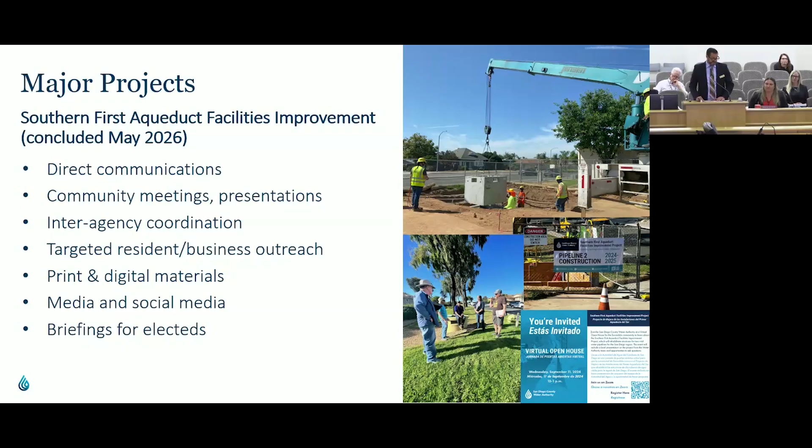The largest project we've supported over the past 3 years is the Southern First Aqueduct Facilities Improvement Project, which concluded in May. It stretched 21 miles through North County and impacted numerous properties, among the most complex outreach challenges of the past decade. The project's outreach plan helped guide strategies, objectives, messaging, and outreach actions during construction, such as the items listed on this slide. As you see at the bottom of the list, we routinely collaborate with our government affairs team to keep elected officials informed about impacts like road closures and changing work schedules in their districts. Next slide.

Communications on the first aqueduct included more than 250 interactions by text, phone, or email, more than 85 face-to-face meetings on site or at homes, at least 200 inquiries or construction concerns resolved, and reaching more than 7,400 properties by mail.

We also held 3 open houses, met with City of Escondido officials, provided language translation assistance to residents, responded to media queries, maintained a project webpage, and walked door to door in shopping malls that would be impacted by traffic revisions. We also held pop-up events in neighborhoods so we could provide information to residents on their morning walks.

One of the challenges with this project was coordinating with the trash and mail service when a road was blocked for construction. I spent a few early morning hours moving trash cans to a new trash pickup spot for residents to reduce the impact of our work.

At the other end of the spectrum are projects with smaller scopes and scales than the Southern First Aqueduct. These are typically in rural or suburban environments and have limited or localized community impacts. Currently, 7 of these localized projects are in development through 2030.

As project teams are formed, Public Affairs conducts early outreach to identify and address potential community impacts so we can tailor our outreach efforts. 3 such upcoming projects include repairs, facility improvements, and a new facility in Escondido, Valley Center, and Poway. None of which are expected to have significant community impacts, but each of which must be studied and monitored as work plans evolve and then communicated to neighbors when the time is right.

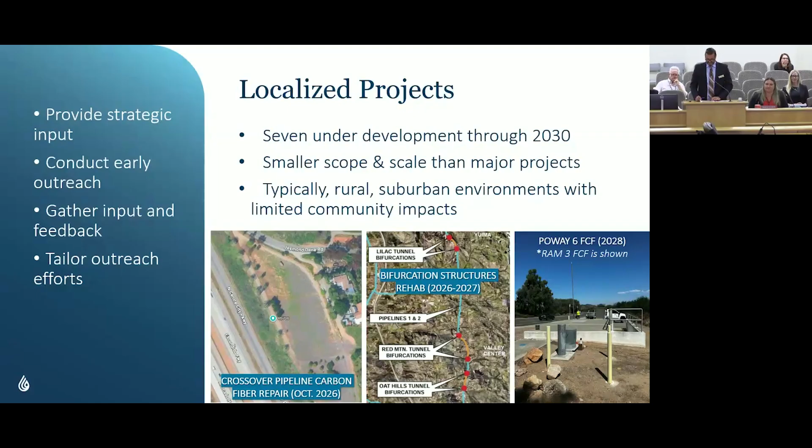There are a few big projects on our radar. One of them is the Ramona Pipeline Improvements Phase 1 project with 2 work sites west of the 15 and 1 in Rancho Bernardo Road. That's the one in RB Road.

That will require temporary lane closures from November of this year to January of 2027. Over the past 16 months, we've been coordinating with businesses, elected offices, and community groups to make sure they are ready for this inconvenience and do what we can to minimize it.

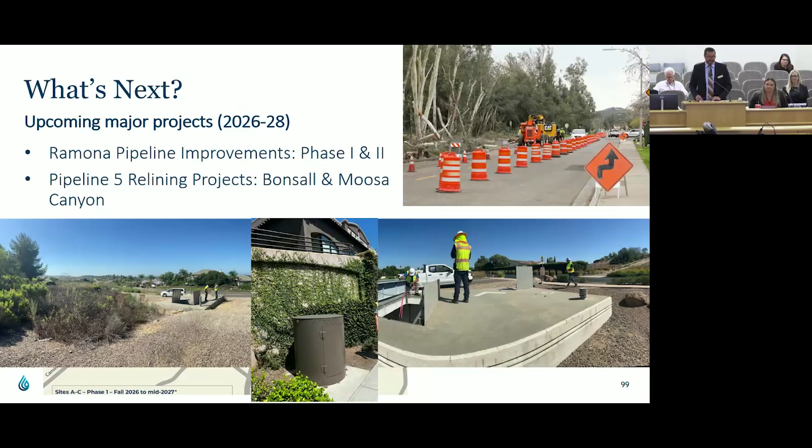In addition, we're preparing for site work on the Pipeline 5 relining in Bonsall, near and south of the Oceanside 5 flow control facility in the coming weeks. This will have sound impacts in typically quiet rural areas and impact one neighbor's trash pickup and access to their property.

As you might expect, we've worked closely with that neighbor, as well as the trash servicer EDCO, on alternate plans to maintain trash service and property access.

We've also had at least 10 meetings or conversations with property owners near the work areas, and we'll be reminding all neighbors and stakeholders, including the City of Oceanside and Rainbow Municipal Water District, who has a nearby facility, about upcoming construction activities. By inviting input from stakeholders, coordinating with member agencies, and establishing lines of communication with residents, Public Affairs assists the project team in developing solutions to mitigate impacts.

Public Affairs assists the project team in developing solutions to mitigate impacts, and we invite you to be part of this process.

Given the evolving nature of the CIP and how connected you are to your communities, Director Wall, thank you for your comment and desire to communicate with the community at Lake Hodges. We closely coordinate with the project teams and do intend to provide timely notification regarding that project.

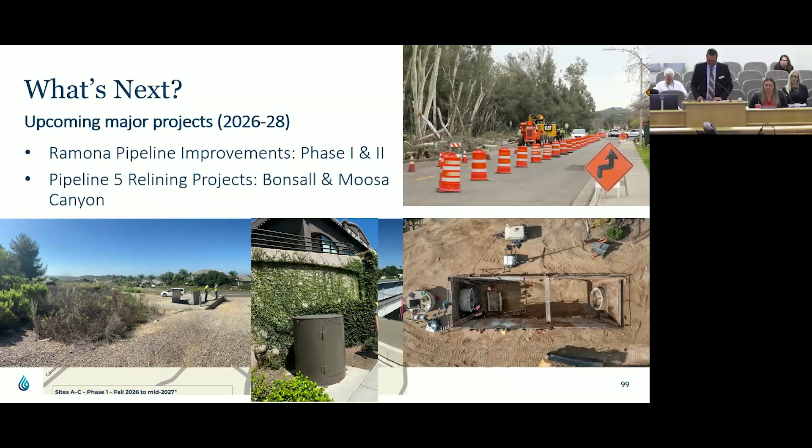As work continues on that and other projects, I do invite any board members to let me or my colleagues know if you have questions about CIP projects or concerns about impacts, and we'll coordinate with the project team to address them. One final note, aside from the project-specific outreach, our work involves communicating more broadly about the value of asset management and infrastructure investments.

We recently launched a new webpage that helps explain the value with videos, photos, and interactive info. We call it Guarding Our Liquid Lifelines and invite you to explore it through the top issues section of the homepage. Thank you for your time. That concludes my presentation.

Thank you. Are there any questions or comments? Director Robak?

Thank you for the presentation. I was thinking about how our customers, like at Otay Water District, would know about projects. Of course, it's the outreach you talked about, but a lot of times they'll go onto the website looking for information as well. So when you were talking about this, I went to the Water Authority's website to see how a customer might go about looking that up. I'm assuming that's on the homepage in terms of navigating projects and programs.

Is that correct? That's correct. Okay. And they would go down and whatever projects that are currently underway would populate in that section, correct? Yeah, the current navigation is that there's current, future, and historical projects on there. Right, because I wasn't complete. Some of the things you went over, I didn't necessarily see them come up. Sure, so that's why I'm asking, if they didn't get your outreach, how would they get that information?